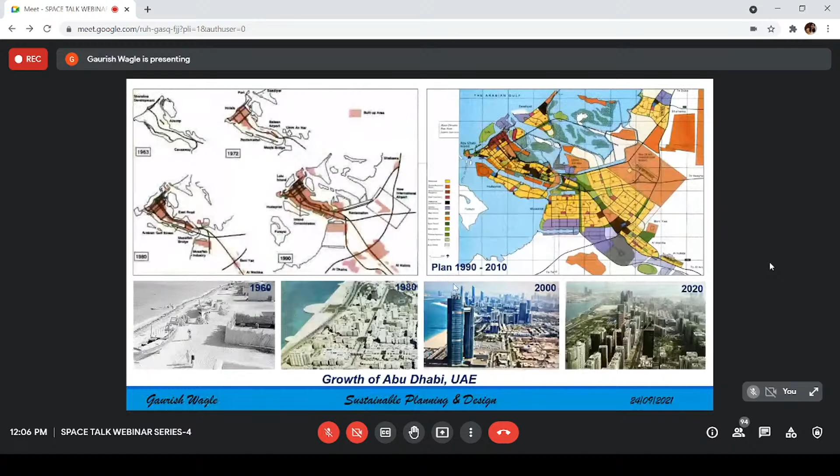Abu Dhabi was no different. In 1990, in 2006, when I came, I had to visit the municipality, and they said, we don't know how to approve a master plan. So that was an opportunity for me for getting a good job. But so I don't regret it.

By 2006, between 2000 and 2020, when I came here, the land everyone had started developing. So around 2005, 2006, land was gifted. This is the island which I was pointing out. Three developers started developing it. One developer was given one piece of land, another developer was given another piece of land, and the rest was kept by the owner of the island.

I was fortunate to have worked on the structure plan of these developments, basically setting up the structure for them, because originally there was no accessibility pattern for the city, just one lane trying to access 6 square kilometers of area and targeting around 12 million square meters of GFA. I used to work for a company that had a project to develop this master plan, called the Najmat Reem Island Master Plan.

Sustainability had no mention. All my contribution was a master plan. We designed a master plan, and when we designed it, we realized accessibility was going to be an issue. We did some sensitivity analysis and designed a road pattern, which we provided to the municipality, because the same company was also to provide consultancy to the municipality.

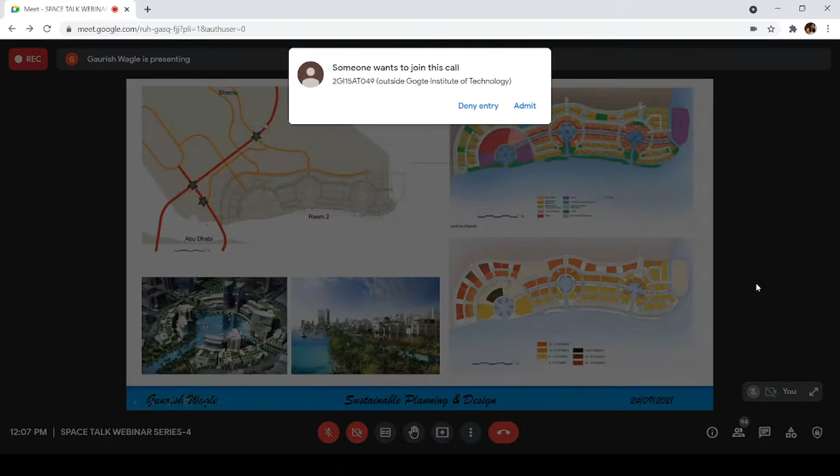The development now is a highly successful development off the coast of Abu Dhabi. If you allow me to go back, that's basically located here. Can you see the screen moved and me pointing out on Google? Is everyone with me so far, or I'm hoping that everyone is on track.

So basically, the master plan had three clusters. It was a cluster-based development. Land use had no strict parameters - you could define your GFA, your gross floor area, the land use pattern, and the building height. So what we did here was define it into three clusters: one was a marina square, one was a mixed-use square, and one was a residential marina, and all were facing the water.

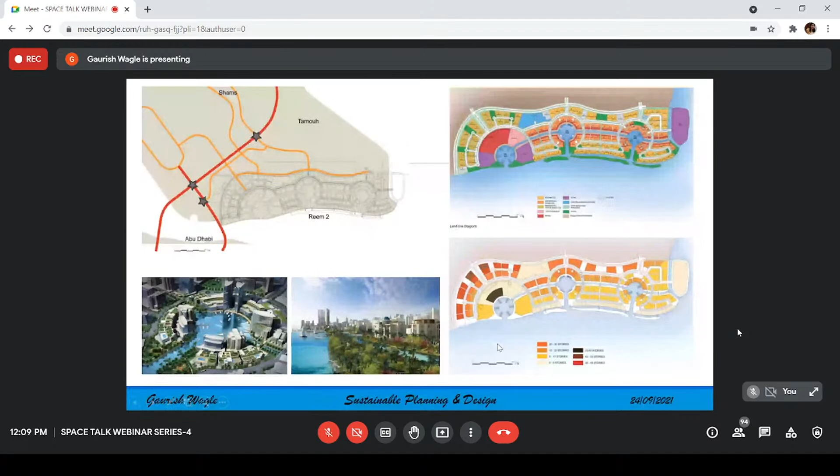So pretty much a low density development along the waterfront, which seemed to be a fairly good way of developing, considering the environmental concerns, etc. The high rises were located beyond, with some important buildings accentuating. So this was the typical land use pattern, but again a high density development, because everyone was interested in making maximum money out of the minimum resources they had.

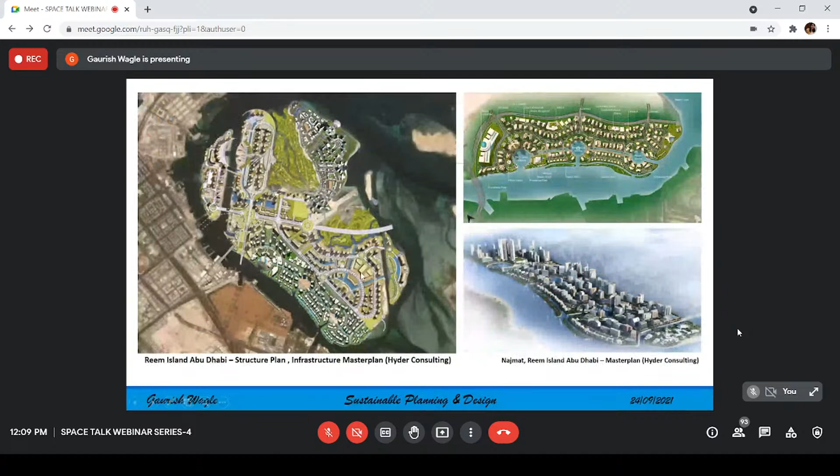Around about the same time, I had the opportunity of working in Dubai, a very similar pattern. We had 14,000 hectares here, and the major structure plan used to always come from somewhere in the world, in the US or in Malaysia. This one was from the US. The Palm Jebel Ali was from Malaysia and Hong Kong.

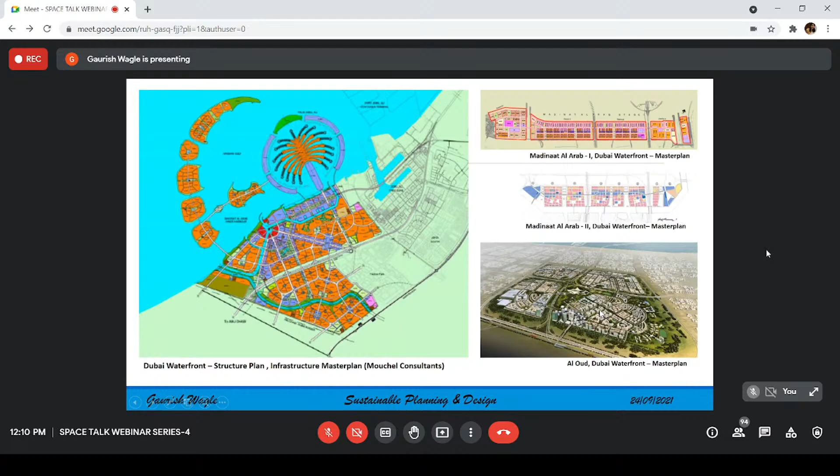So this was again a master plan. Pretty much what we tried to do here was make sustainability a focus. The thought that master plans have to be people-centric was developing, as against a plotted development where everything is strewn around. Here was an approach where the developer was saying, how can we build sensitively, how can we be sensitive to development? So we developed a cluster-based approach.

This still seems to be my favored pattern of development, and it's very successful the world over. You basically break it down into clusters and see how you can improve. Here we were fortunate that we could pass the road through the development, which over a period of time is not my preferred choice, but that's something. This was split into 4 large clusters, around 5.6 million square meters of GFA to be endorsed, with a pretty much central area which we developed as a central green.

This basically reduces the congestion from the main spine and connects the cluster by a route. We developed a public realm strategy, which starts influencing people and helping them develop a well-integrated public realm, because people are the focus.

So that's something that started developing. Sustainability came into focus in 2007, 2008. We had the first sustainability roadmap. This was part of the Nakheel development, and we tried to develop a sustainability roadmap. That was my first initiation into sustainability.

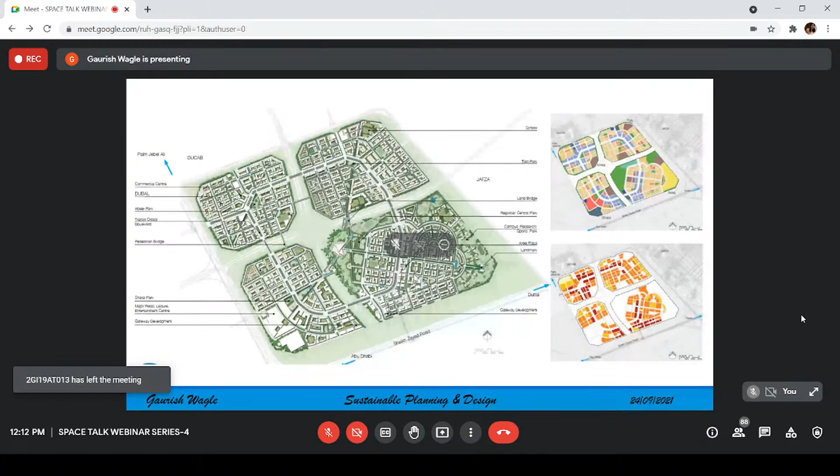The leaders of the country saw that this was pretty much difficult, and they tried to analyze what was happening, because resources started being exploited and infrastructure was no longer sufficient to cope. We had done analysis and shown them if they were to develop in this way, where would everyone end up?

So the leaders took this seriously, recognized it, and set up a vision. By 2005, 2006, the world was talking about needing 5 planets if we continued living the present way, and the place is affluent. In 2005, they realized Abu Dhabi had the highest consumption of power, the highest consumption of water per capita, and the highest waste produced from each household. So it was alarming, and they decided to put the brakes.

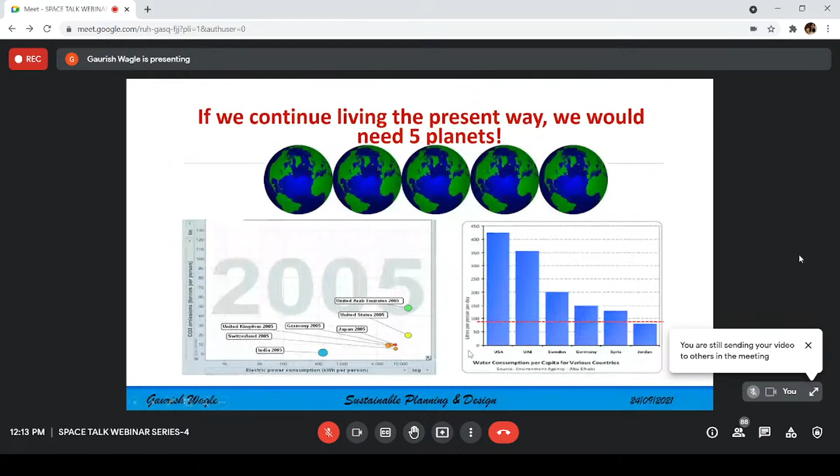They said a planning framework is very important. Till now, there was no planning framework, no urban growth limits. It was just a land use plan, and that's where the initiative of the planning framework came into picture.

As we were developing the planning framework, I was fortunate to be part of that. Coming from India where I was working for the government, knowing the processes was very helpful for me. We broke it down with the think tank. The main consultant was imported from Canada, Larry Beasley. He's an astute planner known as the father of urban planning.

He first introduced what we called the Canadian grid, because he was from Canada, and the whole urban growth limits were broken down into districts.

They decided that the capital district would shift from the city to the outskirts and form the main focus, integrating it with transport and connecting all the districts with a proper transportation network. Along with that, the planning framework was developed.

So what we developed was the Plan Abu Dhabi 2030, then a surface transport master plan. Also developed was a systemic plan for Istidama, which means sustainability. Abu Dhabi's initiative stated that sustainability has to be at the core of all developments.

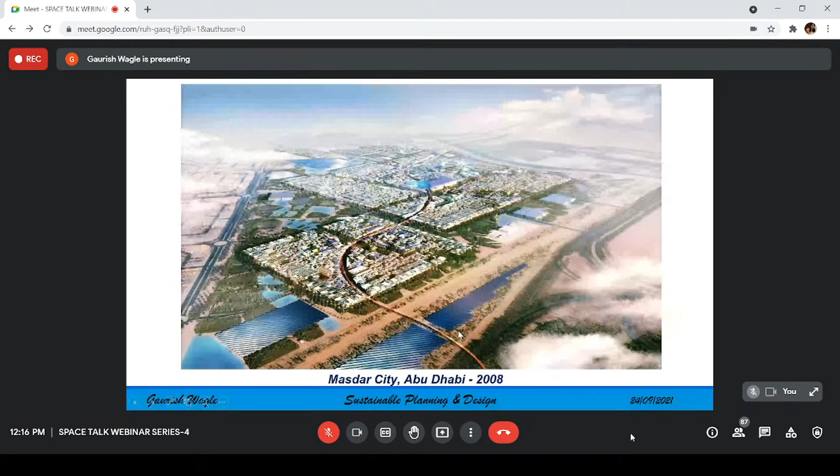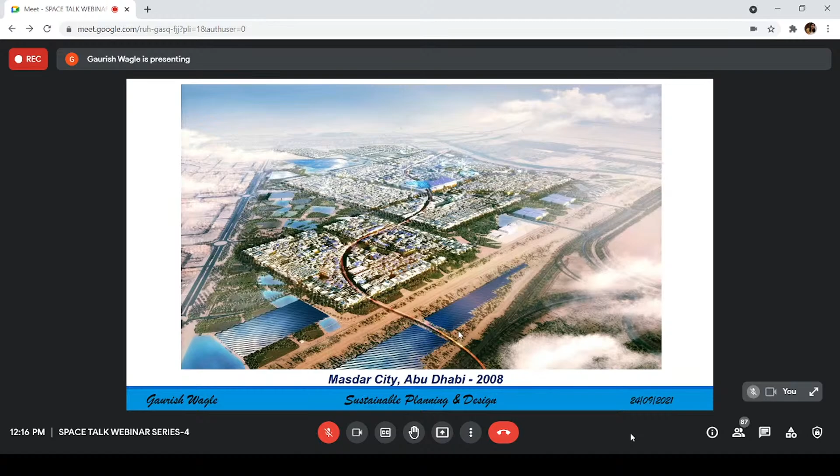So the developments were enforced, and around the same time, the government launched Masdar, which is supposed to be Abu Dhabi's flagship project for sustainability, to set the benchmark for sustainability and provide a place for new technologies.

Masdar was set up as a company somewhere in 2006, 2007, around the same time the government realized the importance of sustainability, that a huge focus needed to be developed around it to make an impact all around the world. So Abu Dhabi was leading the initiative.

I joined the company around 2008. This was a plan which was handed over to me on paper. There was a competition in 2007. I think everyone is very keen to understand the Foster's plan.

So this is an image of the second version of the Foster's plan. I went through the first version. We went through it as a team and engaged with Foster's in London to come out with a more practical solution. So that's where we are. So where did the Foster's plan develop?

A number of companies were invited to build the world's most sustainable city. Foster's pitch was a contemporary interpretation of traditional Arabic cities, studying various Arabic cities like Aleppo in Syria and Fez in Morocco.

If you allow me to talk a little on history and urban form, you can see that most traditional urban forms were compact, concentrated around city cores, and that had a reason: people were relying on each other, with a close-knit community as against a spread out one, so communities were compact.

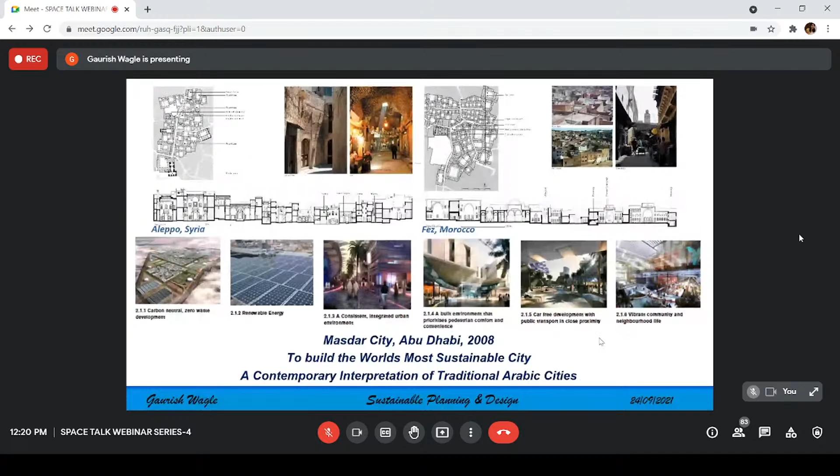What came in was a car-free development, again an aspiration about how you can do it, but there are mechanisms to do it, and ultimately a vibrant community and neighborhood life which responds to the sustainability planning and neighborhood principles.

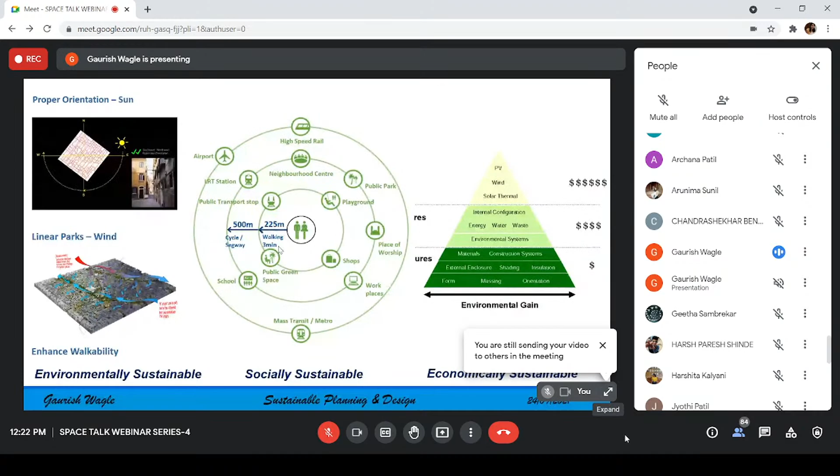This was an analysis done for thermal comfort. This is a walkable criteria in a temperature of between 40 to 50 degrees Celsius: you cannot walk more than 225 meters, 500 meters for cycling, etc. So routes were introduced to basically reach those places, replenish with certain facilities, and then the other facilities came into play.

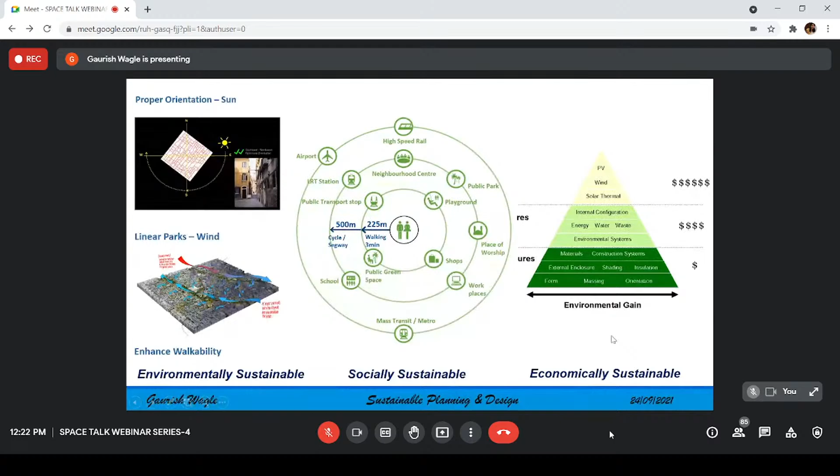A lot of focus on the built form was emphasized on passive measures, which are highlighted, and with a minimum, so the whole development was laid out as a compact square, with the introduction of wind channels or green form.

This is basically an evolution of a pattern which every city, or master development community, if analyzed in the right way to see how it has evolved, can be broken down into its evolution. This is how Masdar evolved: the city blocks, there were two blocks, 1.5 by 1.5 kilometers and 750 by 750.

So the idea was compact, so it would reduce the minimum impact of sun, thereby heat absorption would be less, and the dependence on energy for cooling would be less. You replenish that with wind channels, with basically the green fingers. So basically people get access to park spaces, as well as it channelizes the wind, which makes it more cooler and helps people. So the urban fabric becomes cooler.

You introduce minimum transit corridors. So there is a metro corridor here which passes through Masdar. There is a light rail transit corridor which basically forms a multimodal node here, so that gives you another impetus to basically develop a multimodal transport.

And then the street pattern is overlaid, if you see here, with the major connectors and developing, which basically provides the connectivity, primarily walkability at this point in time, but I'll explain to you how we broke it down into. And then straight grid lines are boring.

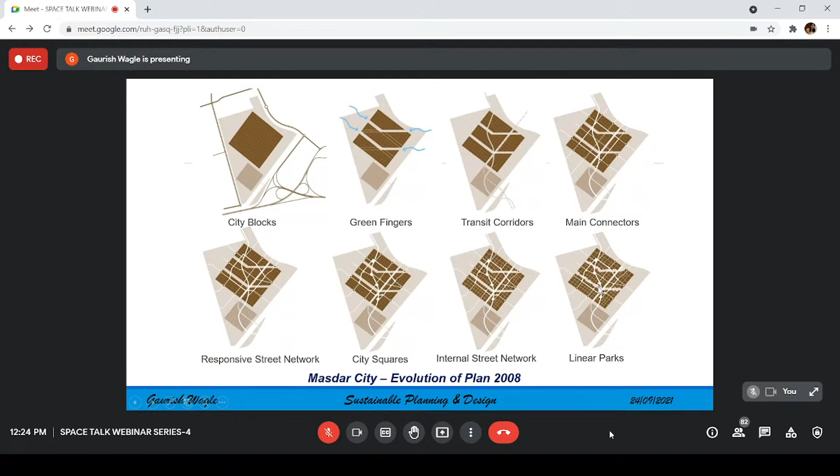So basically you form a nice pattern, responsive street network, create an interest which basically responds to the original organic form, and then you see that at the intersections you start developing good open spaces, plazas, the primary plazas, the secondary plazas, and then within each of that cluster you start developing an internal street network, and then you start developing a form for the parks, you start developing the spaces, and what you get is a master plan which basically responds to the aspirations and the vision that is set out.

Just to give you an idea of how compact the city is, normally developments, if you see the development on the left side, is for around 20 people per hectare. It ranges from 20 to 50 people per hectare. But to make it sustainable, what was proposed was a square which basically works at around 140 people per hectare if you take the full site.

Can you see my cursor? Hello? Yes. Okay, so this is the full site of Masdar.

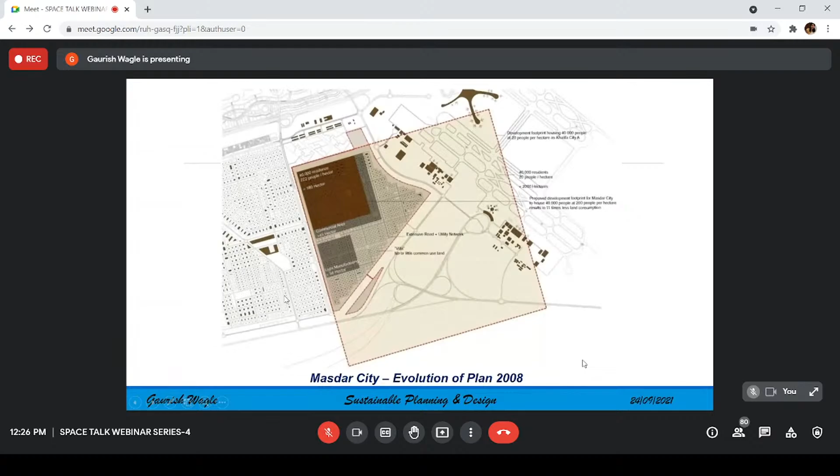So if you consider the whole site, it's around 140 people per hectare. But when you condense it on a square, which is Masdar's large square and the small square, it's around 220 people per hectare. What it means is, if the people were accommodated to a density of the adjoining developments, which we consider are non-compact and many times unsustainable, you would require a square of this size to accommodate the development at the same density which is on the left side. So this gives you an idea of how compact the original plan was and what the principles were used for.

Again, this is a land use plan, and what was proposed was, now how do you narrow the streets? So what I typically give a term of a vertical integration. So if you see here, normally streets are laid where you have the car, which is the transportation. Can you see the middle core?

Yes, so that is the transportation. This is how typically the streets were laid out, and this is an illustrative plan. So you have the transportation, on the side of it you have the people, so people walkability areas here, and the infrastructure runs below the pavements, and on the side of that is the buildings. So what it does is, instead of street being 10 meters, the street corridor becomes 20 to 24 meters, and that starts becoming a little bit of discomfort in terms of thermal comfort.

So how do you make the people comfortable is to narrow the streets. And if you want to narrow the streets, what you do is, instead of a horizontal integration, you do a vertical integration. So plus, in addition, the rooftops needed to be used for renewable energy. So the whole concept was, you create this, what we typically call as undercroft below the buildings, which are basements.

If you call this the ground plane, these are the basements. So basically, these are used for the mechanical, electrical, plumbing areas. All the infrastructure went below in a tunnel, and the buildings were run, and the renewable energy was here. So you had the infrastructure core, the transportation core, the people or the pedestrian plane, and the buildings, all integrated in a vertical integration.

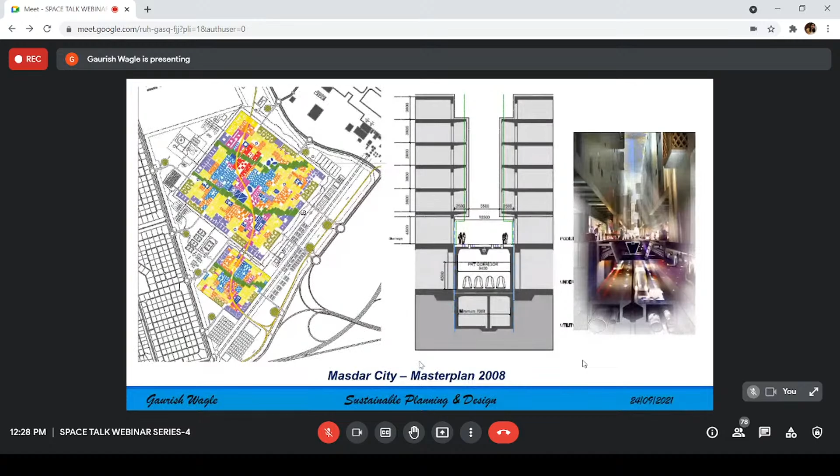So the leadership took a very conscious decision that we need to evolve, to find out how we could evolve without impacting the original vision and goals. So we went through a serious exercise, again with Foster's, and developed a new concept of spatial planning by around 2012 to 2014.

So the concept was, rather than developing it as one project with roads on the outside and parking areas segregated on the outskirts, you make it an integrated development. We broke it down into neighborhoods, connected by green spaces and a transportation network. The major network still remained the same, and the industrial areas needed more space for outdoor.

So we transitioned from one super block here to multiple blocks, which we call neighborhoods, implementing the government's initiative of sustainable neighborhood planning. This is how we overlaid it on the same spatial structure, a 1.5 by 1.5 kilometer grid and a 750 by 750 meter grid, and saw how the network could be developed as roads.

So the whole strategy was, rather than developing one complete project at one go—which is almost impossible for anyone to do, even if you're a rich economy, building a super block of 1.5 by 1.5 kilometers is super tough—the idea was to break it down into smaller clusters of 750 by 750 and distribute.

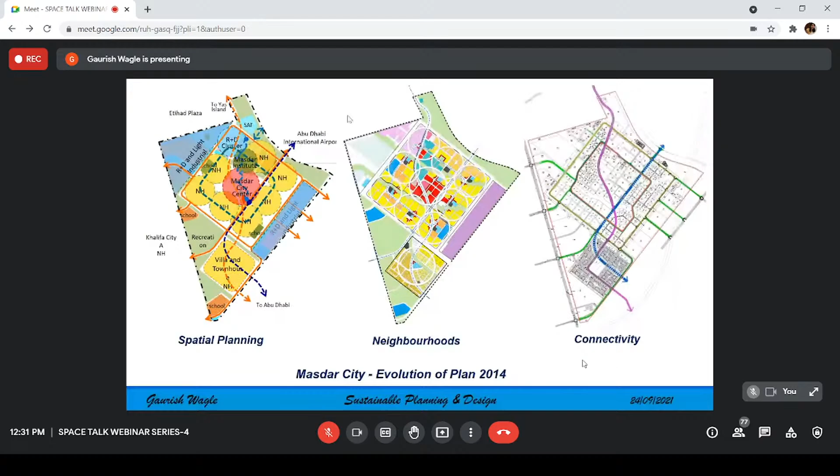So you had linear greens and smaller greens facing various areas, creating a sort of sustainable urban fabric that uses the same principles. The buildings within could still be compact, and then basically sustainable. We also used the concept of nodes, accentuating certain openings.

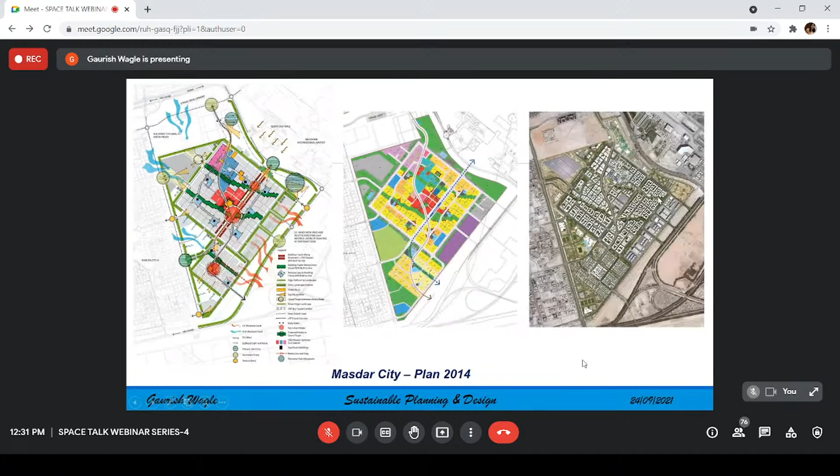What are the important arrivals in the city? This creates a complementary structure, as against an unsustainable, non-green resource, we developed it into a very sustainable green community without any compromises. So this is how we transitioned from a super mega project into a pedestrian friendly, sustainable community, combining neighborhood planning, connectivity principles, and thermal comfort.

I think I've hit the top of an hour. Will you allow me to continue for another 10 minutes? Yes, I think you can continue. If the audience is okay, I'll try to wrap up in another 10 slides. But if you allow me, I want to take you through a few other initiatives that were done, and then open it out for questions. Is that fine with everyone? Yes. Because I can go on for a couple of hours more speaking about it, but we can take it from there once we finish, and when everyone has anything to ask.

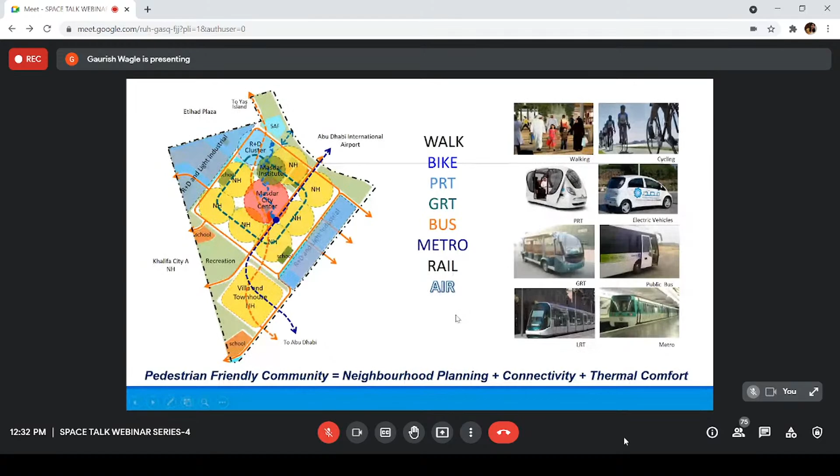We've completed, as per the planning process, we don't stop at the land use plan. After the land use plan and concept plan, we go into a stage called the detailed master plan, which is very important. At the detailed master plan stage, you develop the actual guidelines, urban fabric, and define how the development is to grow with tangible parameters for sustainability, infrastructure, etc. So this is how we progress: we define the clusters, what they are and how they're to be developed, define a land use plan along the same lines, and culminate it with the built form plan.

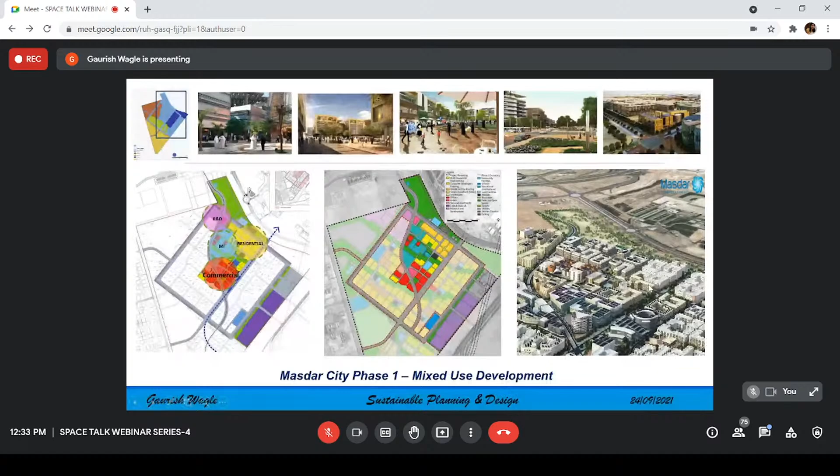So what comes out of it is a framework plan where everything is laid out, which are the important spines, which are the streets, which are the greens, which are the important activation streets. So to complement it, we develop a public realm interface, because people are important.

The cities are for people. Cities are not for people who live only within the blocks. Cities are also not for people who have a very stylistic approach in developing iconic buildings. So to give enough flexibility, we identified the public realm interface. We also defined the private realm interface.

My thesis has been on a lot of places in Goa, in Margao specifically, where the back spaces or back alley spaces are wasted spaces. So how can you integrate the internal spaces and create a better public realm is a big challenge which we try to address here, and that's an important aspect of planning for the people.

And then there are building controls which basically define the height, the footprint, basically the floor plate. So this is a stage-wise approach, and this is not definitive. This is evolving over a period of time.

And then out comes a development control sheet, which basically defines the public realm, the private realm, and basically what are the controls along the streets, etc., and gives enough flexibility for the architect to basically design the urban fabric. That's a three-stage process that we follow.

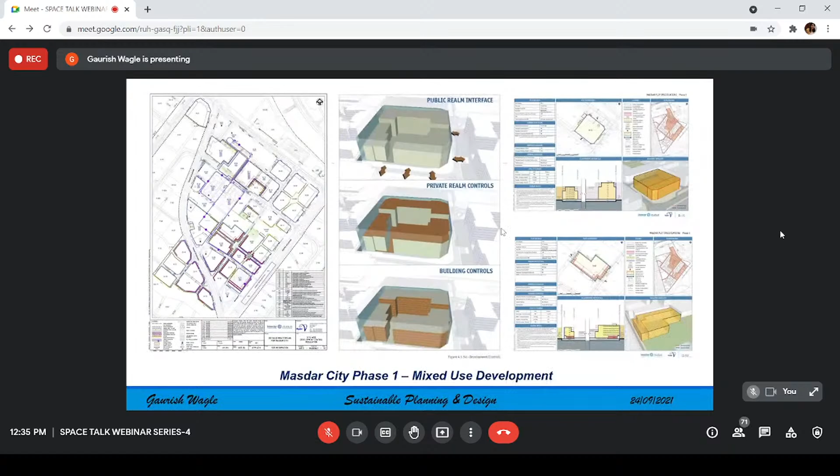From there on, we did the detailed master plan for phase two. And if you want me to come back to these, let me know at the end of it. If anyone can point out, I can come back to these later on.

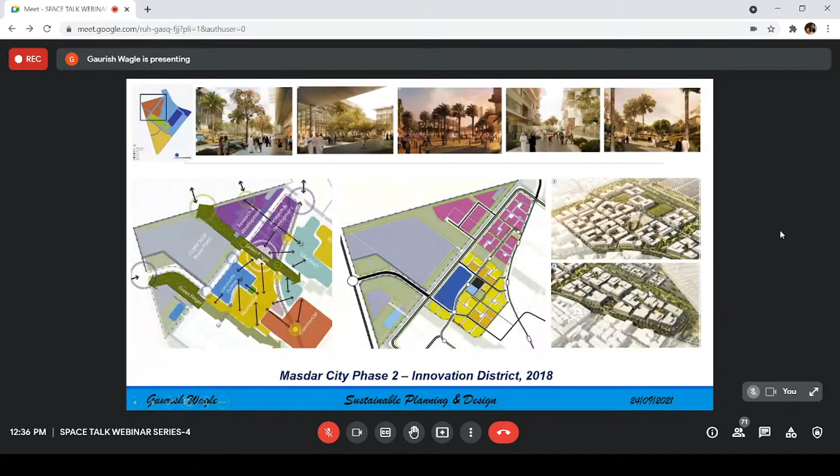Phase two integrated with phase one. We defined the clusters: innovation cluster, residential cluster, complementary to the commercial, defined the land use, defined the build form. We basically develop a site plan. So this was a little different approach than what the first one was.

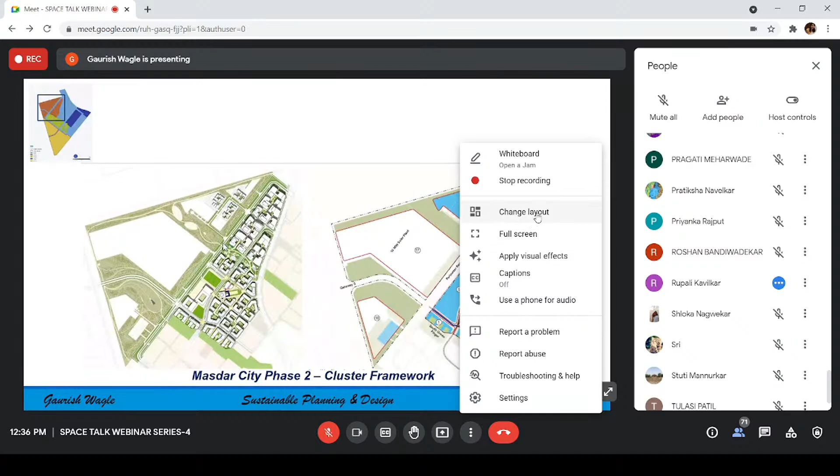The first one was individual plot-based development control regulations, whereas here we developed a cluster-based approach because this was basically addressing development pressures. Phase one, the plots were too huge. Each plot was around 20 to 30,000 square meters of gross floor area. We got feedback from the market that they want smaller plots of 10,000 square meters, 12,000 square meters. So we broke it down into smaller plots within the fabric, and that's how we developed a cluster-based approach.

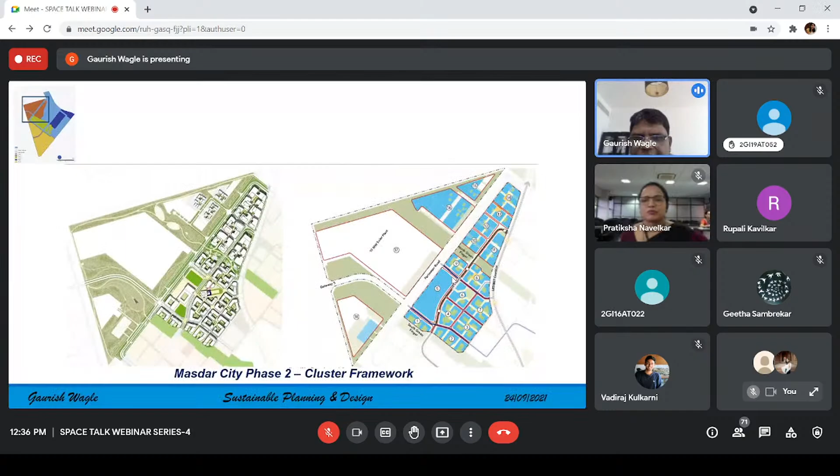So it's very important for sustainable master plan communities to address the need of the people, to address the need of the market. Otherwise, the city dies down or is a dead space.

So as against a plot-based cluster development, this is a cluster-based approach where we still define what are the internal spaces, but the internal spaces are public. I mean, you have each as 4 plots or 3 plots or 5 plots, whatever the cluster is. And then the interconnectivity is improved with a very good emphasis on public realm.

So the public realm flows. It also helps wind movement. Again, the same principle: minimize the sun, maximize the wind passing through, thereby cooling the building envelope and reducing the energy demand.

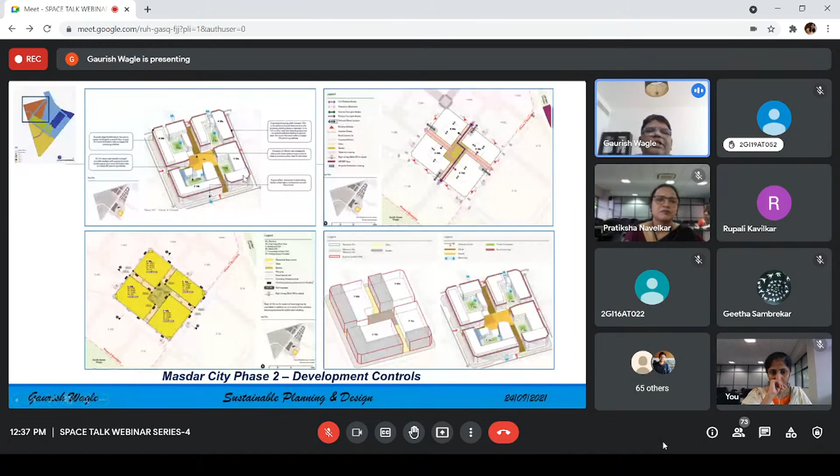And also define everything, and then you define which are the active frontages. So define the building blocks and define a cluster. So that's a development control.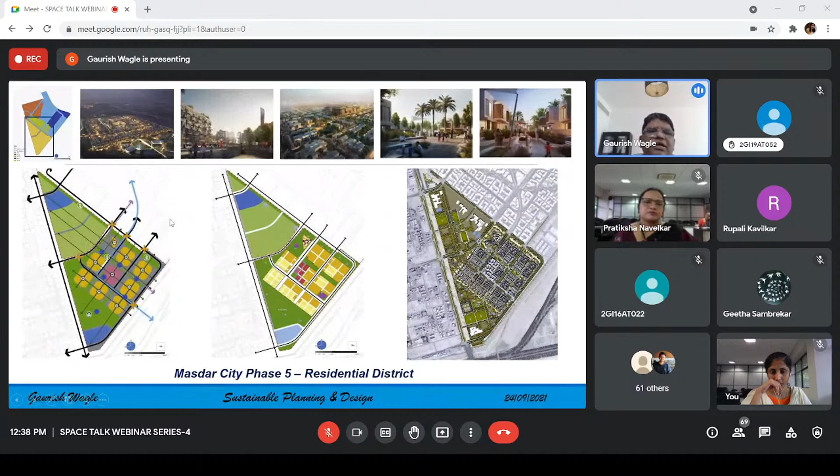The third approach was a residential district. Now again, we had phase 5 of Masdar city. We worked with a company called AECOM. Again, the sort of same approach, a little different in that here, each plot had to be defined, because now, as against a mega plot, big plot, and a small plot, you have to define a residential plot. And that's a residential typology.

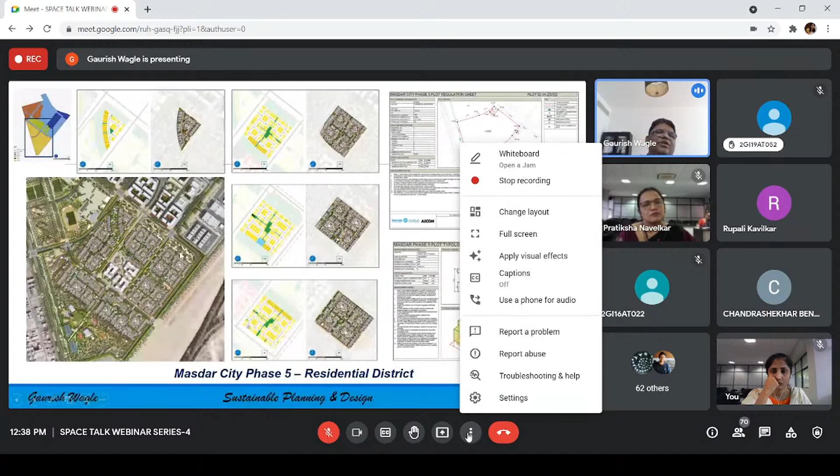So the whole square is around 1,600 plots. Each plot has a typology. Each typology sits within a cluster.

So if you see what I've laid out here is cluster 1, cluster 2, cluster 3, and cluster 4 in the same, just for better understanding. And you can identify it from this core here. So each cluster has its unique character, but all are connected by this space, which is an urban space that connects. There is an internal connection, as well as the residential units are external.

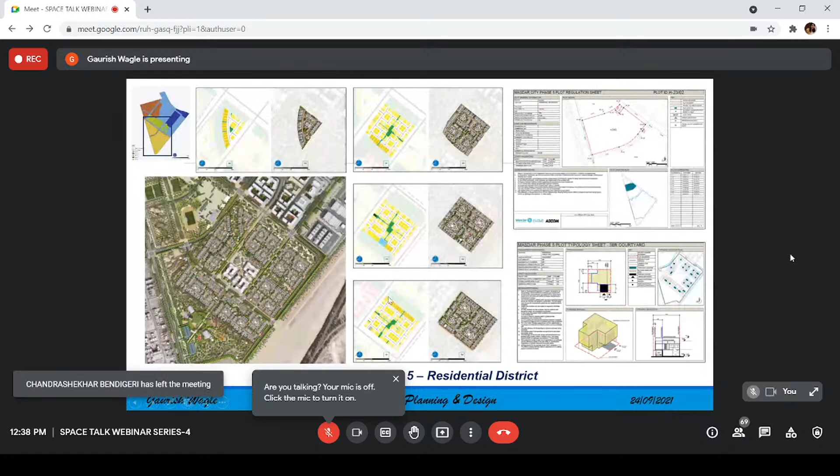So there are major spines, minor spines within which, and circulatory patterns. The block builds from a plot to a mini block to a super block to a mega block. I think you're familiar with that, and we can come back to this. So that's where we reach, and all these are developed and laid out on a framework plan.

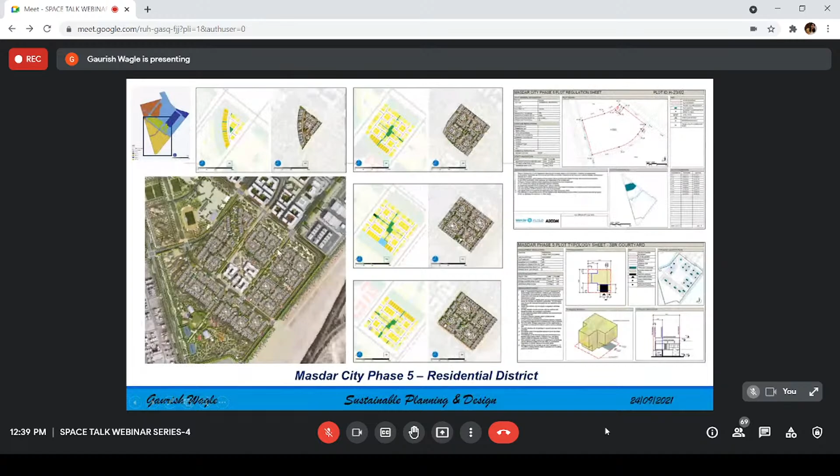So in 2010, we set out building an institutional typology, again a 3 Pearl building. As against 3, we developed a 4 Pearl building. We have successfully implemented an institutional typology, and a commercial typology, and this typology is set to a benchmark of sustainability key performance indicators. That's how it's developed.

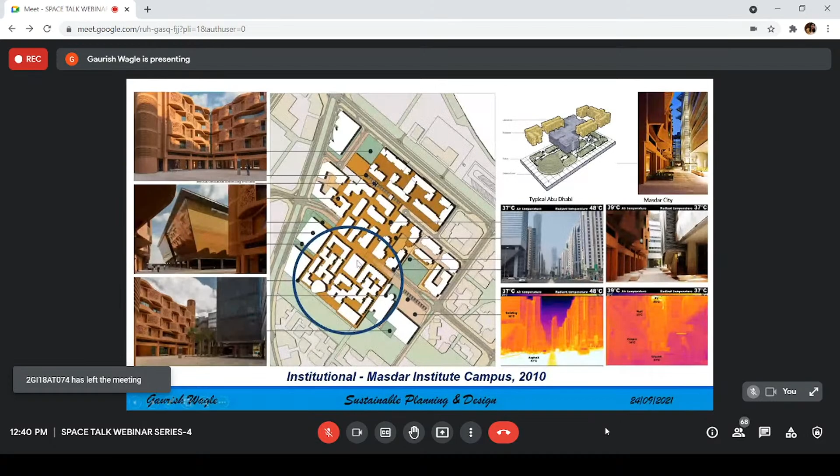And then in 2015 we also- so this building, this complex, is around 70,000 square meters of GFA. Don't get carried away by the size of the plan, but this is 70,000 square meters of GFA. This is around 22,000 square meters of GFA, a commercial building.

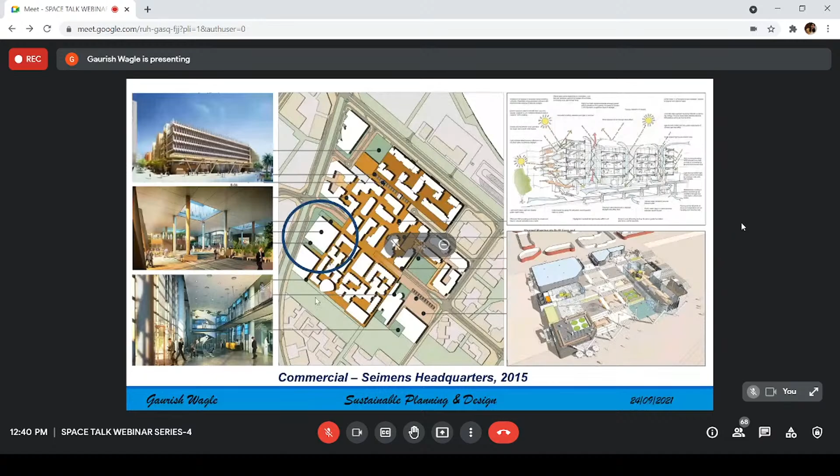Which achieved a 4 Pearl rating and LEED Platinum rating- if you're familiar with LEED Platinum. A cluster which is 100,000 square meters of GFA- this is a complete cluster built and developed right now and functioning. So this was also a 4 Pearl building and a platinum building.

So as against our benchmark of 4 versus the minimum of 1, 3 or 4- as against our benchmark of 3 instead of the minimum 1, we've started achieving 4, and we are striving towards making it business as usual.

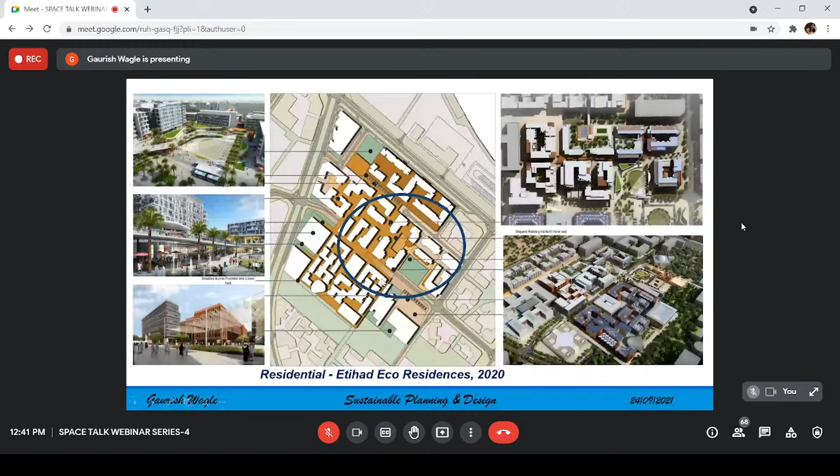And lastly, a little bit of initiative that has been my personal initiative is basically the strategy for smart cities. I've started as against the incorrect notion that only high-tech cities can be smart. We're trying to set out parameters and a framework for a smart city. So as budding students, I would say this is an approach you always need to keep in mind.

Based approach, or GIS based approach, where we can understand each layering. We need to combine it with BIM. So basically this is a life cycle of a project, which is a concept of geodesign, and which we're trying to implement in Masdar right now for better sustainable performance.

You plan the infrastructure- all this can be done in GIS. You design buildings and integrate the infrastructure and buildings in GIS and BIM. And from there, it becomes an asset. So facilities and assets can be monitored using CAFM, and this is built into the first part of my discussion.

You plan well, you build well, and you optimize by taking an approach of monitoring and developing a system which can monitor and feed back into the building. So the whole loop can be a cycle, which is very important for developing sustainable plan, sustainable design. I will not get too much into this, but that's where I'll leave you with some thoughts.

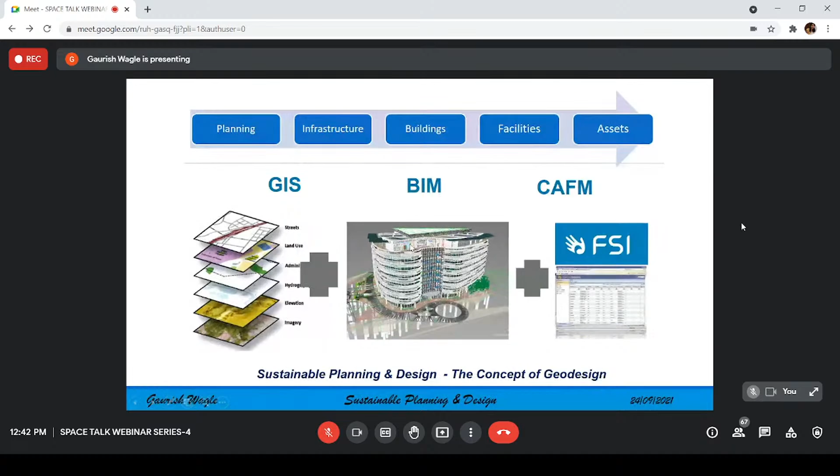And so that's the horizon here. And I think the planning horizon for completing the whole city, which is 3.6 million square meters, is around 2030 to 2035. So I don't know whether I'll be here, but I'm positive that we'll keep moving towards the target.

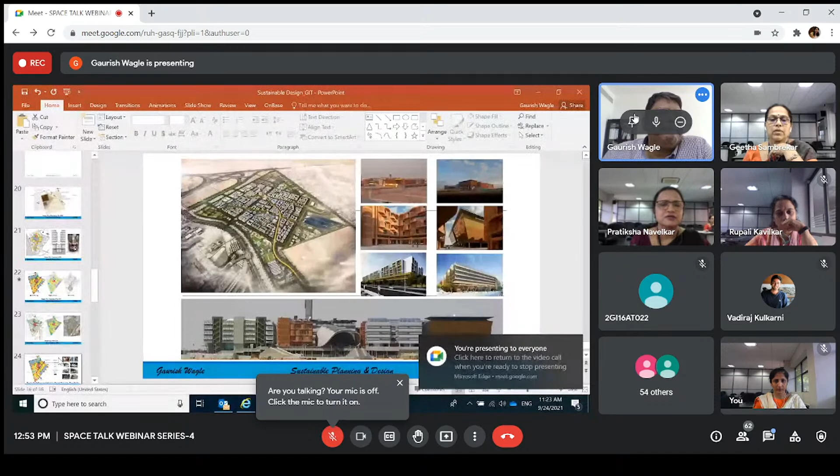It also had something called a PRT, which is basically a point-to-point transport. So the way it's functioning is the internal network within a neighborhood is replenished with walking and cycling networks which run through, and there is an overall cycling network—I don't have the diagram, I can share it later. The major avenues, this boulevard, this avenue, have cycling routes.

To our surprise, the surrounding fabrics use it more than Masdar, because Masdar is not so much inhabited right now—we just have around 7,000 people living inside. But the surrounding fabrics, who did not have a safe environment to walk and cycle, have started using it. So yes, we have walking routes, cycling routes.

We've got the PRT within the cluster which we've developed. We've got electric vehicles—we did pilots with Mitsubishi in 2010, now the Chevy Bolt in 2014. We have introduced electric chargers in the exteriors, basically to influence people to use electric vehicles. Very soon we are also doing a pilot—these are the initiatives. I think if I understood your question correctly, you are asking about the initiatives. We are doing a pilot with a vehicle called Navia, which is a French technology, that runs within the streets from place to place.

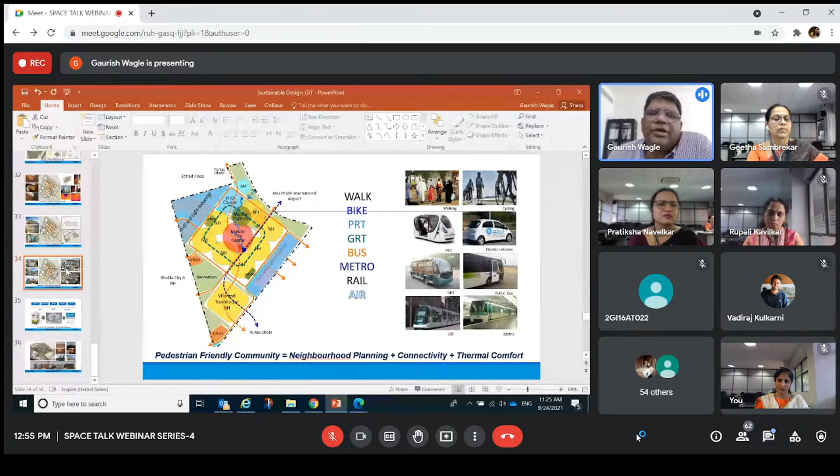If you see this plan, right now the vehicle, which is Navia, runs within this pedestrianized core. It's basically a 2-meter size vehicle that moves all around and shuttles between points, so from building to building you've got the Navia electric vehicle, or you've got walking routes.

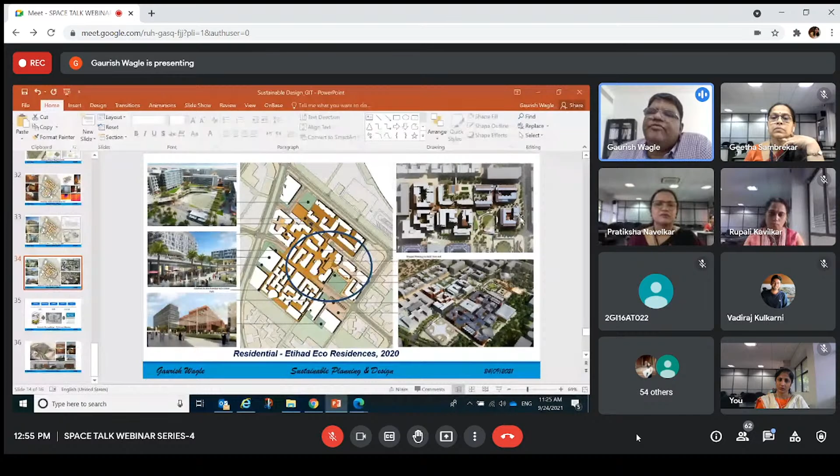These routes are integrated within the fabric. If you see here by the side, there's a cycling track, and similarly around. So all these major routes have got a cycling network around, plus it's got a cycling network all around, connecting people well with the clusters.

So the clusters are well connected with the cycling network, and being less populated right now, there's minimal use within the city, but it's used more by people from outside than inside, because they have a cycling-ready network. I don't know if I answered the question straight, but thank you, sir.

Thank you, sir. What's your reaction? What's your suggestion? Let me put my question a little differently. I want to know: one initiative is reducing distances so people are encouraged to walk. What's the other initiative you've done for walkability or cycling? How do you initiate this, because the climate there, as far as I know, in Abu Dhabi, people's first approach is not on feet.

Correct, they would want the tires. So how do you move from tires to feet? How do you encourage that in that kind of climate, and is it feasible for people to walk these distances with the initiative? You'd have to shade them, maybe, and keep some other facilities there to encourage them to walk. So what are those street-level or walkable-level initiatives? That was my question.

That's a good question. Estidama sustainability has a lot of focus on shading and SRI values. There are two important KPIs we have embraced: one is outdoor thermal comfort, and one is ecological enhancement. Outdoor thermal comfort emphasizes the SRI, or solar reflectance index, of the pavement material. It forces us to use lighter colored materials, and materials with less... I'm sure you understand SRI values, so increased SRI values influence reduction in the heat island effect.

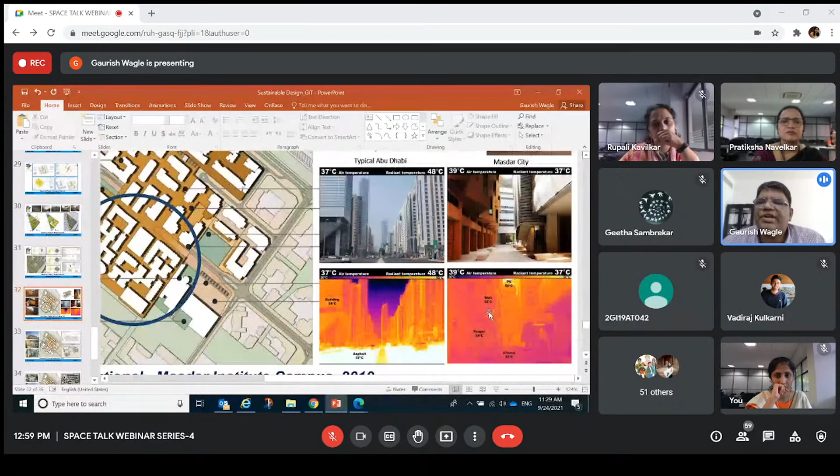Now, as against normal streets which are around 12 to 15 meters, we make a conscious attempt to reduce the street width and use shared surfaces. This analysis was done at the same time of month comparing a normal wide Abu Dhabi street with Masdar City. There's a difference of around 11 to 14 degrees Celsius in radiation heat clearly felt within Masdar City, due to narrowing streets, sensitive SRI values, and the planting initiatives I'll come back to.

We have very stringent material restrictions on SRI values and shading criteria. The facade materials have to be lighter colored so they reflect rather than absorb heat, reducing the radiation that reflects back from facades onto the street. Because of the height and built form criteria, this reflectance is reduced manifold, so the radiant temperature here reduces by around 11 degrees Celsius. Compared to 45 to 50 degrees, 36 or 37 is a much better walkable criteria.

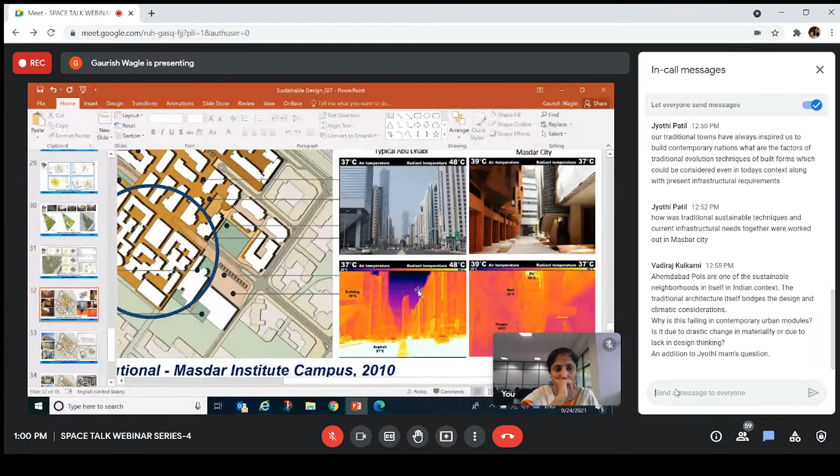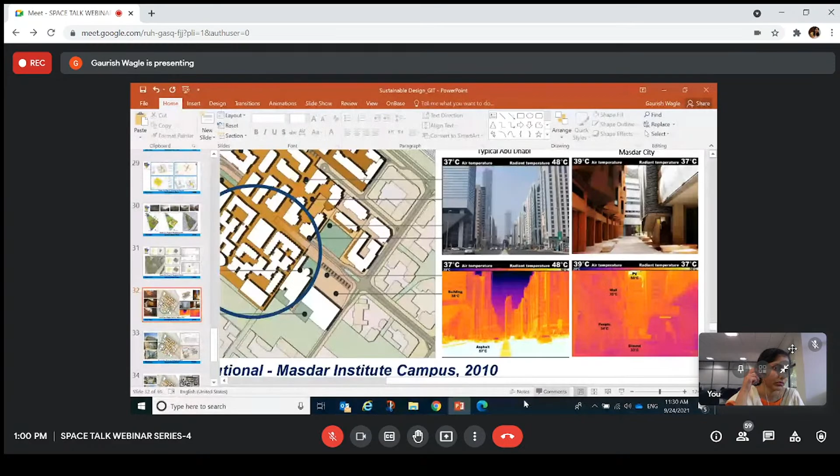These are actual measurements with thermal cameras—this is a typical Abu Dhabi street, the one where I live, and this is Masdar City. That's one initiative. The second initiative is we have an enhanced KPI for ecological enhancement.

So what we say is the minimum shading you can do in a street, at equinox and non-equinox. There are prescribed criteria in the Estidama standards - you can do 30% or 40%, but our criteria is 80% of the street or cycling path should be shaded. The shade plus reduction of the reflective index helps a lot in improving thermal comfort, and that's what we are doing in a big way. It costs us a little more, but again, it's a life cycle consideration.

From there we go into water management. Ecological enhancement is also tied into local species, so we've got a very strict plant list which uses low consumption water. Our target for water is 2 liters per square meter - that's one of our KPIs for landscape.

For cycling intensive streets, we've got a concept called hydrozoning, where we increase the water allowance to around 4 liters per square meter for streets requiring enhancement. So we do a balance of 3 liters per square meter - 2 liters where you don't have those requirements, but where you have pedestrian and cycling streets, you increase the plants to around 70% shading of the route and allow a little more water so you strike the balance at around 3 liters per square meter.

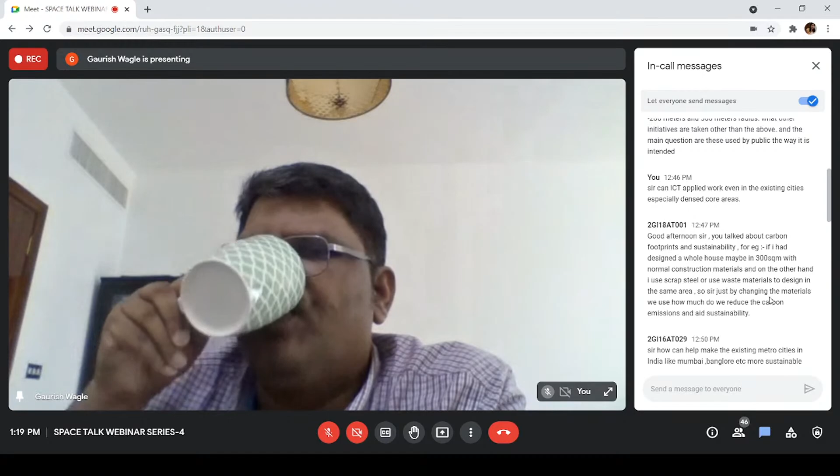Yes, true. I'll go to another question from one of our students. She says, good afternoon sir, you talked about carbon footprints and sustainability. For example, if I had designed a whole house maybe in 300 square meters with normal construction materials, and on the other hand I use scrap steel or waste materials to design the same area, just by changing the materials, how much do we reduce the carbon emissions and aid sustainability? So it's about a changeover from contemporary construction materials to more sustainable materials, and how much percentage that makes it more sustainable.

From our last 10 years of studying this, since I also look at that performance, we've been able to achieve it for developers with no inputs from us, except for steel structures. If you use all other materials, we've easily been able to do a reduction of 15 to 30%. As against the UK standard of 615, we've been able to achieve something like 450 to 475 very easily. The issue we still find is steel. We've not been able to tackle the embodied carbon challenge of steel, so that's still a challenge. But for other materials, 15 to 30% is easy.

And we are now trying to implement it in the public realm also - the use of recycled concrete pavers, recycled concrete steel in manhole covers in infrastructure development, the use of HDPE rather than PVC in piping. Cast iron is becoming a dangerous material, so you could use recycled pipes instead. HDPE is equally environment friendly, reduces cost, and is as long lasting a material as cast iron. So these are some of the initiatives we are doing in infrastructure and the public realm.